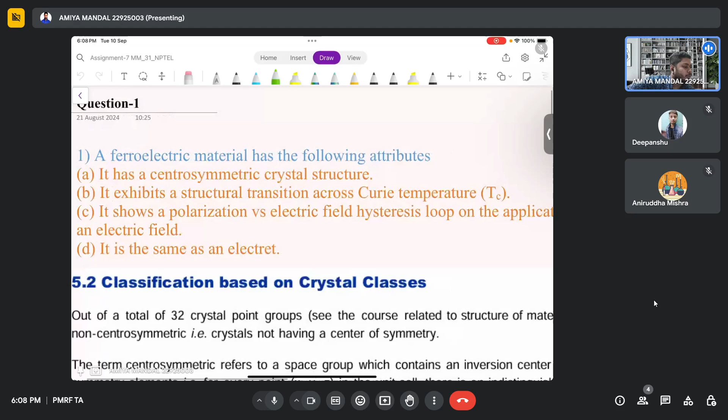So let's see what question number 1 is about. A ferroelectric material has the following attributes, with 4 options. It mainly discusses the basics of ferroelectric materials. It has a centrosymmetric crystal structure, it exhibits a structural transition across a certain temperature, it shows a polarization versus electric field hysteresis, or it is the same as an electret.

So first, let's understand centrosymmetric and non-centrosymmetric crystals, which I already discussed in week 6. Centrosymmetric means there must be a symmetry in the unit crystal: if a point in the crystal lattice is x, y, z with respect to the center point, then there is a symmetric point at minus x, minus y, minus z. Crystal families showing this type of symmetry are called centrosymmetric crystals.

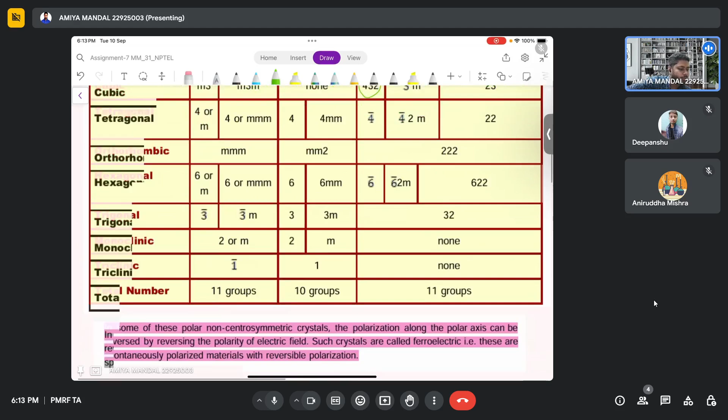This table shows the centrosymmetric and non-centrosymmetric point groups among the 32 total: 11 centrosymmetric and 21 non-centrosymmetric. There are 7 crystal systems in 3 dimensions: cubic, tetragonal, orthorhombic, hexagonal, trigonal, monoclinic, triclinic. According to them, the centrosymmetric and nonpolar point groups and the non-centrosymmetric variation are shown here.

Non-centrosymmetric means it may be polar or it may not be polar, means non-polar. So for polarization, in this case, polar non-centrosymmetric crystals are very important. Ferroelectricity comes in these classes, where the polarization along the polar axis can be reversed by reversing the polarity of electric field. This is the most important property of the polarization.

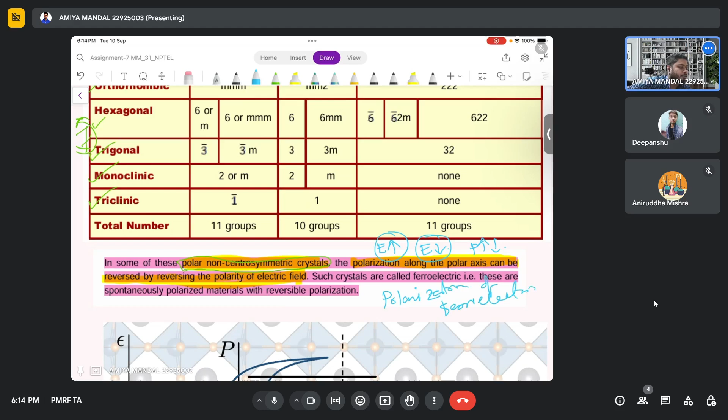The most important property of polarization is that if we reverse the polarity of the electric field, meaning if we reverse the electric field direction, then the polarization direction also reverses according to the electric field. This is the behavior of polarization in ferroelectrics. So these are spontaneously polarized materials with reversible polarization.

So these types of groups, polar non-centrosymmetric groups, show the polarization, ferroelectric behavior. This is the schematic diagram. You can see that with the application of electric field, the polarization is also increasing accordingly and decreasing accordingly after reversing the direction of electric field. That's hysteresis, and we have learned about it.

So this is the dielectric constant plot. You can see that there is a certain peak of dielectric constant, epsilon, at a certain temperature, Tc, called the Curie temperature. We will learn much more about this.

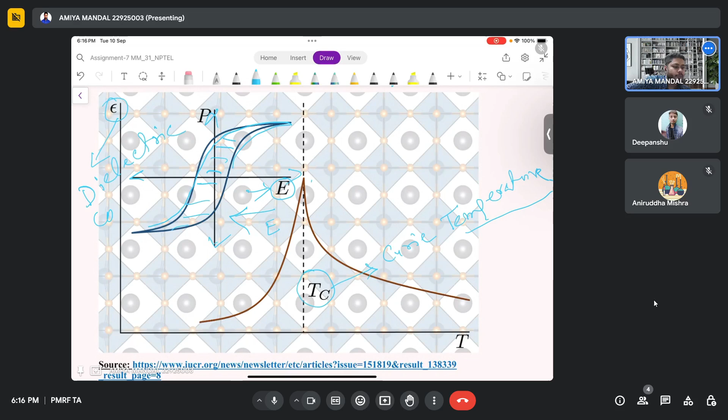I have collected it from this source. So you can see this figure showing polarization versus electric field. This is a typical PE or hysteresis loop of a ferroelectric.

Okay, just wait for a minute. Let's see. Okay, I was just checking whether it is working or not.

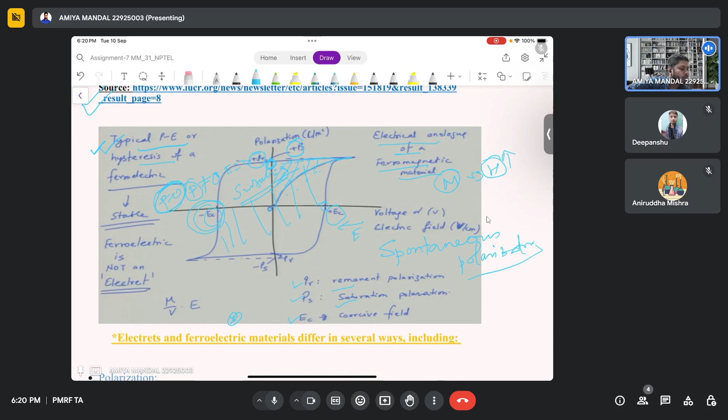There is also one thing that is the electret. The ferroelectric materials are stable, meaning after the application of electric field, they become stable at a certain point, and we get a saturation polarization. But there is a similar type of material that's called electret. So what does an electret do?

In the case of an electret, we do not get a stable value. What we get in the case of ferroelectric material, we do not get in the case of an electret material. So electret materials are different from ferroelectric materials on the basis of stability of polarization.

Okay. So polarization, ferroelectric, so stability value: ferroelectrics are stable and electrets are not stable. Okay, it's not stable. So what are the main differences between electrets and ferroelectric materials? The main difference is polarization.

Electrets have a quasi-permanent electric field on their surface, while ferroelectric material has spontaneous polarization. This is mainly the main difference. So on this basis, we can tell that it's a metastable state, and ferroelectric materials are in thermodynamic equilibrium. Okay.

So, ferroelectric state and paraelectric state, what does it imply? If you see lead zirconate or lead titanate, you can see that in a unit cell, sorry, there are different titanium atoms and oxygen atoms. At the octahedral position there is a titanium, and at the corners the unit cell consists of lead. Okay, we already have learned about this.

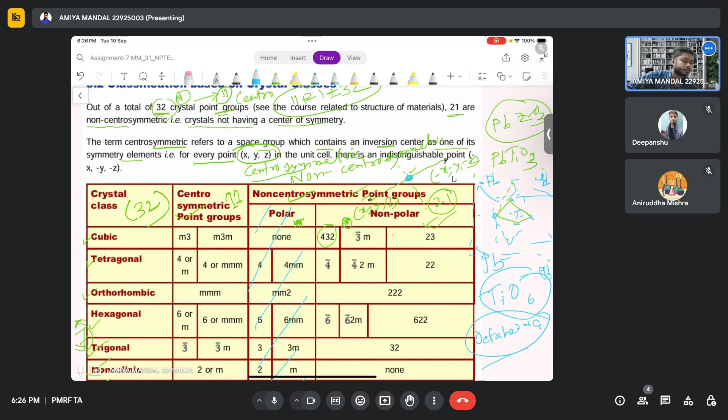So this is the titanium octahedral, TiO6 octahedral. Okay, so if its central position shifts in this direction, then it is termed as a ferroelectric material. Okay. So these paraphase and ferrophase transitions are seen in a ferroelectric material also.

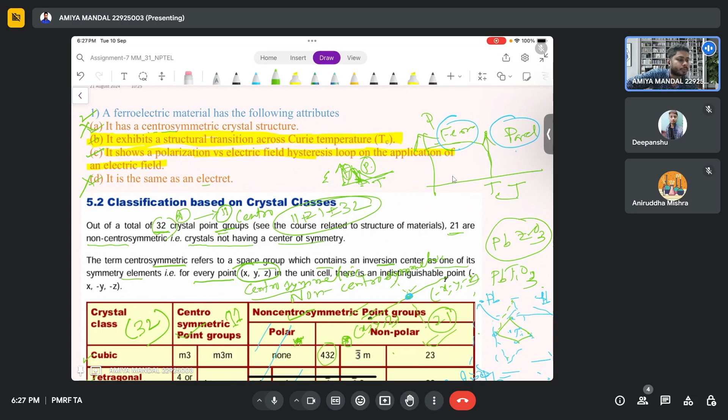At a temperature T greater than Tc, in the free energy versus polarization plot of a ferroelectric system, which are true? Free energy versus polarization plot, G versus polarization at a temperature T, you have learned about this type of figure. Okay. This type of figure, where one minimum is arising in a paraelectric state. So in paraelectric state, E is equal to 0. This indicates paraelectric state, not ferroelectric state.

For ferroelectric state, E is not equal to 0. Okay. So in paraelectric state, in order to compute non-zero polarization and susceptibility chi, at the transition point the values of the energy at P equal to 0 and P equal to P naught must be equal at Tc. Okay. So at P equal to P naught, G naught equal to 0. On the other hand, the field must also be 0. So del G del P is equal to 0 for the polarization to be spontaneous. So del G del P must be 0 there.

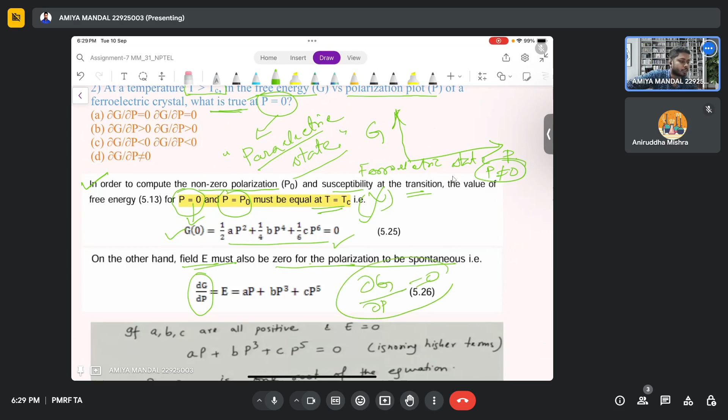Okay. Let's see what we have learned in lecture: A, B, and C are terms which are temperature dependent. A, B, C are all functions of temperature. In this G, free energy, free energy is a function of A, B, C. You already have seen that. Now, AP plus BP cubed plus CP to the power 5 equal to 0, with P equal to 0. Okay. G equal to 0, ignoring higher terms.

So what is this equation indicating? This equation indicates that if A, B, C are all positive, meaning A, B, C are greater than 0, then P equal to 0. So P equal to 0 indicates T greater than Tc, in the G versus P plot. So P equal to 0 at this point, where A, B, C are greater than 0. Okay. And this is expressed in paraelectrics. This is called the paraelectrics.

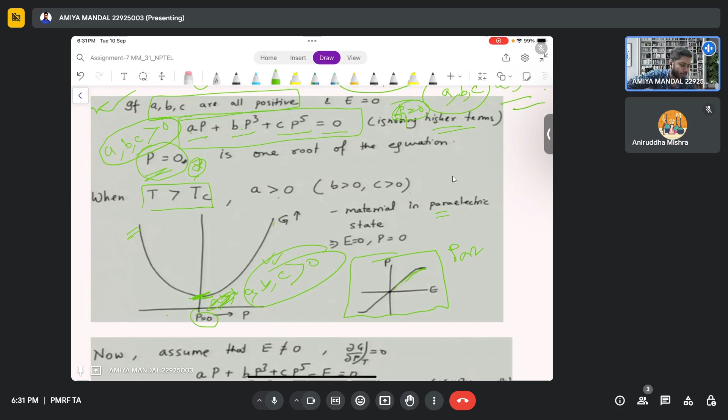Where no polarization loops are there, you can see that with the increment of electric field, it is following the same line; that is paraelectric. Okay, this is the paraelectric state. Now assume that if E is not equal to 0, then del G del P equals E. Here E is involved. And if we ignore these two terms, then we get A equal to E by P. So A inverse equal to P by E. P by E is nothing but chi.

So this is nothing but chi, susceptibility. Okay. So, sorry, this is the case for a greater than 0, which always tells about the paraelectric state, or T greater than Tc. Okay. If we consider a less than 0, means at T less than Tc, when the temperature is less than this transition temperature, then what does it follow?

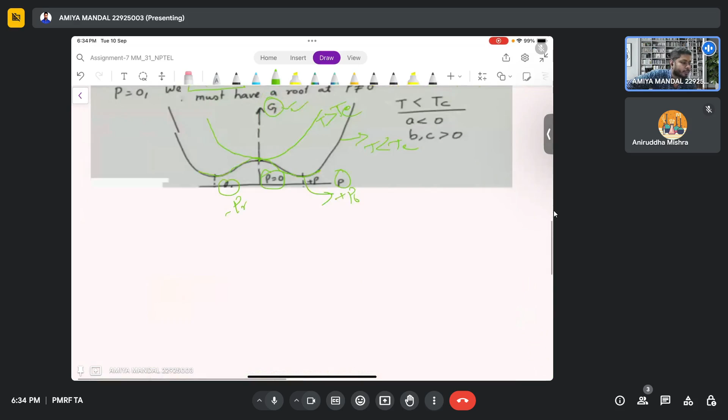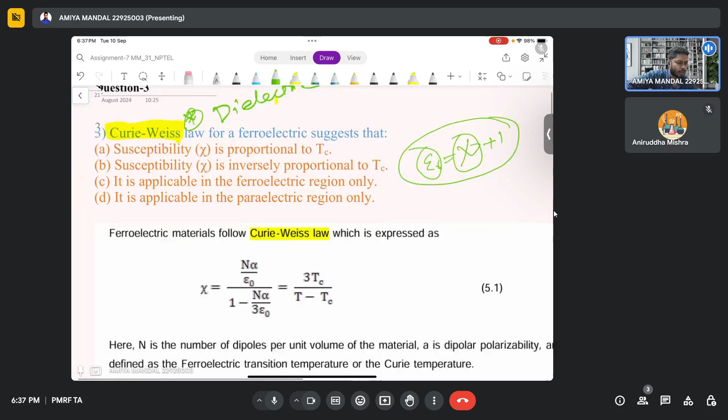So how susceptibility varies with temperature. You have seen this famous relation of Curie-Weiss law, where susceptibility varies with T by Tc minus 1. So this susceptibility varies inversely proportional to Tc.

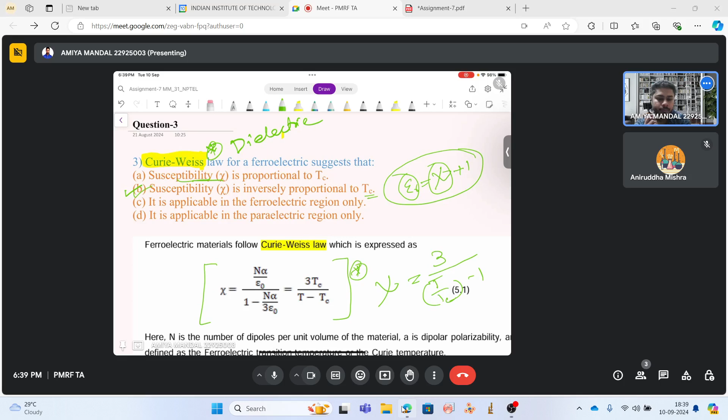Okay, I was just checking the mic. Okay. Has gone there. Okay, now we can start.

We are just telling about the Curie-Weiss law. It is inversely proportional to the Tc, where you can see the ferroelectric material showing Curie-Weiss law. N is the number of dipoles per unit volume of a material. Alpha is dipolar polarizability, and Tc is defined as the ferroelectric transition temperature.

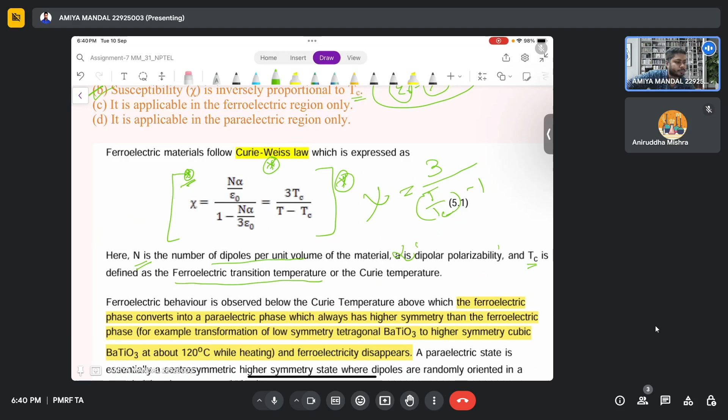If you see the variation of chi, there is a certain jump at a particular temperature. This is the ferroelectric transition temperature. It varies inversely with temperature at T greater than Tc. Ferroelectric behavior is observed below the Curie temperature Tc, and the ferroelectric phase converts into a paraelectric phase at T greater than Tc. Paraelectric phases have higher symmetry than a ferroelectric phase.

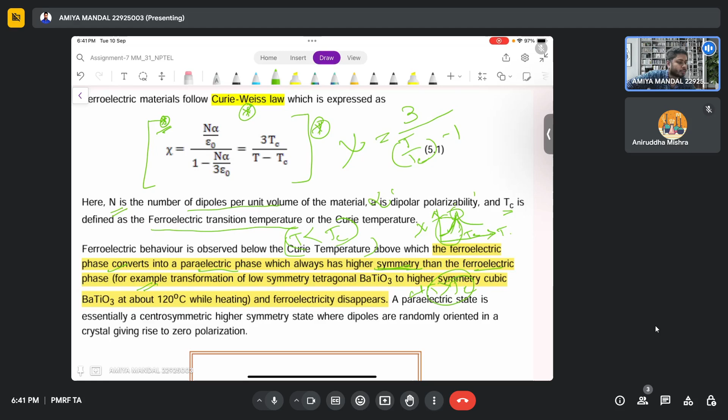For example, the transformation of low symmetry tetragonal barium titanate. Barium titanate has tetragonal symmetry at T less than Tc. Its Tc is approximately 120 degrees centigrade. For T greater than 120, it shows cubic structure, so cubic is more stable. This transition is seen in barium titanate. Barium titanate is a pure perovskite material, which has ABO3 structure.

Similar type of material like lead titanate also shows phase transition around the Curie temperature, where higher symmetric cubic to tetragonal-like structures are observed. These transitions occur due to symmetry changes around the Curie temperature.

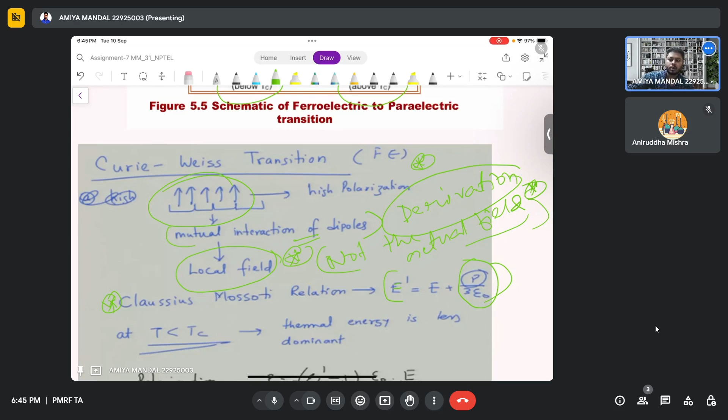On the basis of the Clausius-Mossotti relation, we can see that this local field is greater than the actual field, as it depends on the polarization.

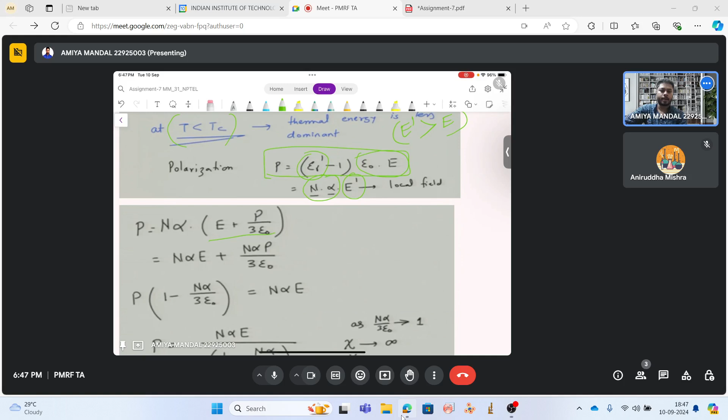If we take it to the left side and try to find the value of P only, then as n alpha by 3 epsilon tends to 1, chi tends to infinity, then 1 by chi tends to 0, then 0. This chi value and epsilon value are related to these constants, and this behavior - dielectric constant and 1 by chi - varies continuously at T equal to Tc.

At T equal to Tc, the dipolar polarization - all this you have learned in lecture classes - I'm just recapping so you can answer the question. Alpha D is much, much greater than alpha E plus alpha I plus alpha, that is electronic polarization, ionic polarization and interfacial polarization - we do not consider these at Tc. Only alpha D, only dipolar polarization exists.

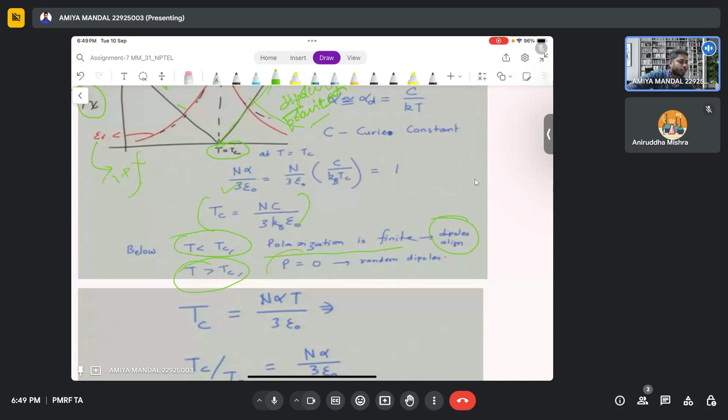At T less than Tc, polarization is finite, that is dipolar alignment. At T greater than Tc, P is equal to 0, that is random dipoles. These are the two very important points: at T less than Tc there is polarization, P not equal to 0, and T greater than Tc gives no polarization. This gives you the paraelectric state, and this gives you the ferroelectric state.

On the basis of this, you can now answer that the Curie-Weiss law for a ferroelectric suggests that the susceptibility is inversely proportional to Tc. This will be the correct answer, and it is applicable in the paraelectric region only, as we applied the Curie-Weiss law at T greater than Tc.

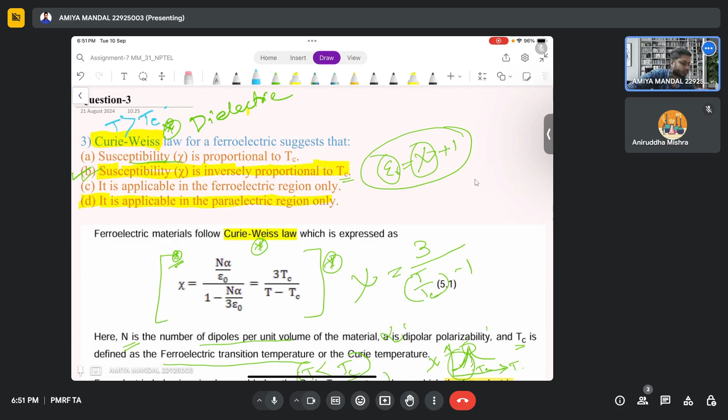Now we are moving to question number 4.

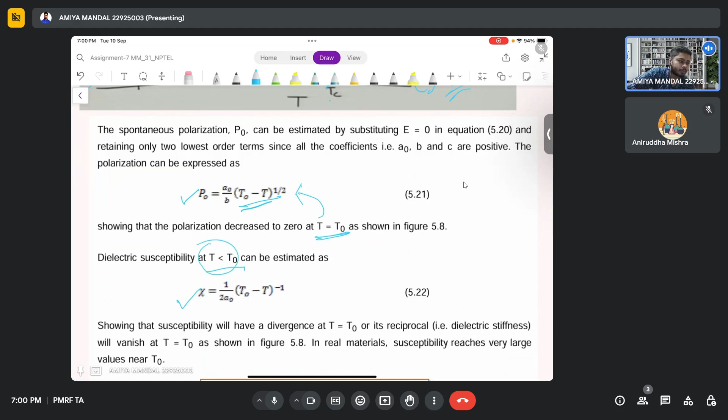So these are some properties of the dielectric, the chi value and polarization value. Here you can see how polarization value with temperature T changes: at T equal to T naught it changes this way, at T less than T naught it is decreasing, with respect to T naught. So on this basis, how chi varies and how polarization varies in second order phase transition has been shown here.

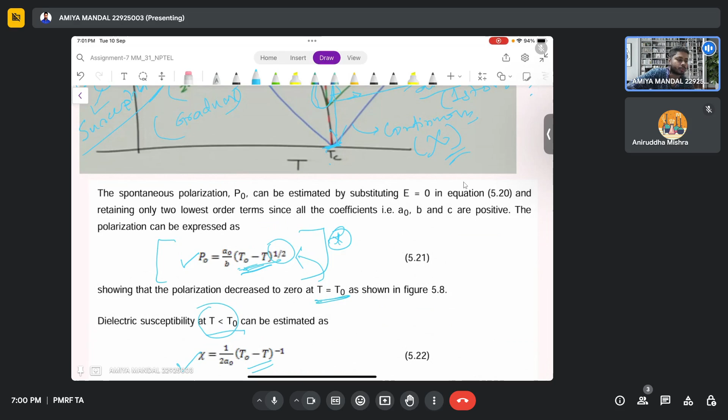This follows the equation you can see: at T equal to T naught, it varies as to the power half. At T equal to T naught, it goes to 0. It depends on A naught and B values. Similarly, it depends on 1 by A naught value and is inversely proportional. On the basis of these two relations, we can tell how P and chi vary, how these two terms vary. But I have told you how first order and second order cases vary, how the dependency joins.

So now you can see what the answer will be. First, it shows the sudden change - no, there should not be a sudden change, there is a gradual change. So it shows the gradual change in the polarization. And next, susceptibility also shows a gradual change at Tc. Both properties, susceptibility and polarization, both show a gradual change. Only gradual changes will be there, no abrupt change.

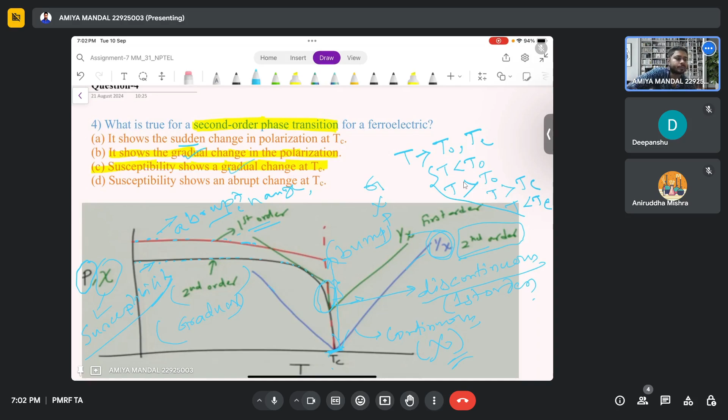What happens to a ferroelectric material when its temperature changes from T1 to Tc? TC means the question is: when a ferroelectric material goes up to TC value from T1 to TC, how does polarization value, E value change, and how does epsilon R value change? Both these changes - this is the question.

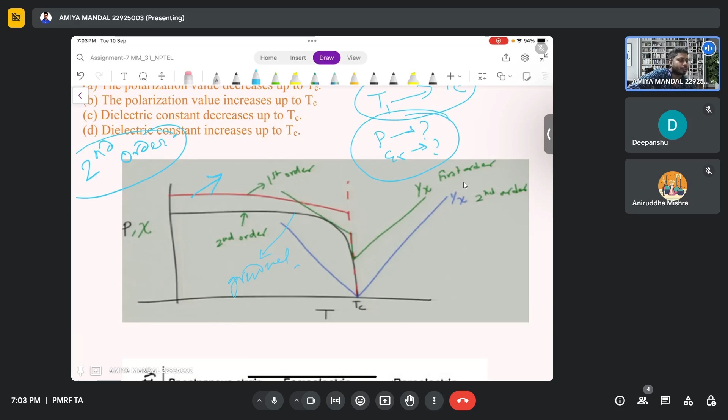So you have seen that for this is the case of second order transition. You can see that for second order there is a gradual change for P, and this is the abrupt change, and this is a continuous change. There is a bump for chi.

So dielectric permittivity, that is the epsilon R value, how it changes up to Tc. This is the region where T is less than Tc. So I am going from T1 temperature to Tc temperature, and in this region the dielectric constant is increasing up to Tc. So in this region, it's showing ferroelectric tetragonal phase, and in this region it's showing paraelectric cubic phase. That is cubic phase, which is the more stable phase.

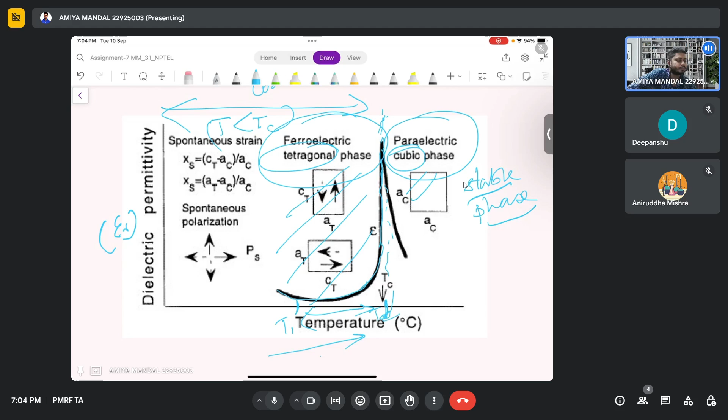So up to Tc, dielectric constant is increasing, and polarization is decreasing. This is the question: what happens to the ferroelectric material when its temperature changes from T1 to Tc? From temperature T1 to Tc, the polarization is decreasing, and from temperature T1 to Tc, the dielectric constant is increasing. So what will be the answer?

Polarization value - it will be a decreased value. So polarization value decreases up to Tc. This will be the answer. And what will be the second answer? The dielectric constant value increases up to Tc. So options B and C should not be correct.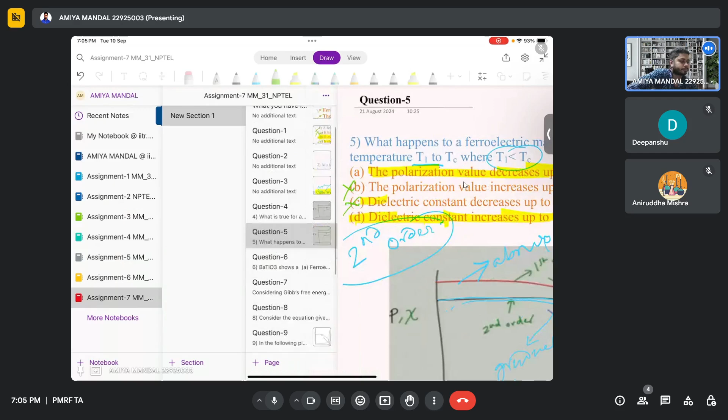Question number 6: barium titanate. This is also a ferroelectric material, a perovskite material with ABO3 structure, where titanium forms the octahedra. It shows two types of variation, tetragonal and cubic, for T less than Tc and T greater than Tc. Tc here is 120 degree centigrade. These are some basic information about barium titanate. So barium titanate is a ferroelectric material.

So it shows a dielectric constant versus temperature plot - how does it behave? It shoots up at Tc. And polarization versus T value decreases at a certain temperature, Tc. It shows that polarization follows a second order transition, because polarization value is decreasing up to a certain temperature with no discontinuity. For polarization versus temperature, there is no discontinuity.

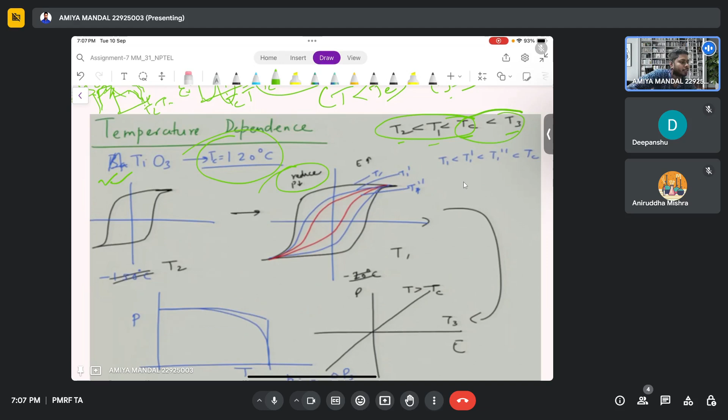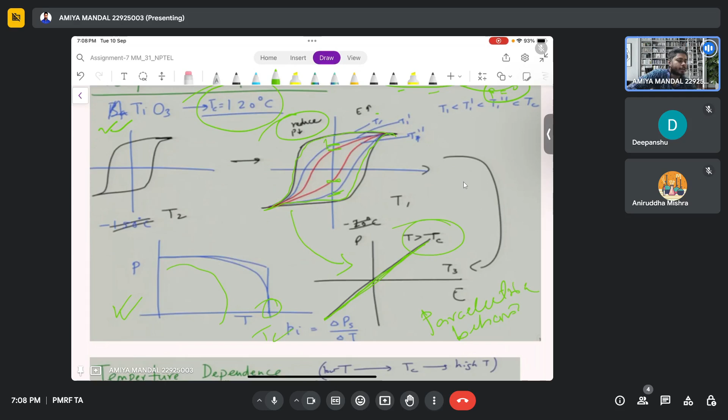So just see this figure for barium titanate, whose transition temperature is 120 degrees centigrade. When we increase temperature from T2 to T1 to Tc to T3, these are less than Curie temperature, so for T less than Curie temperature, it's going to reduce P, and when it is greater than Tc, P equals 0. So P value always goes on reducing. You can see for T1, for T2, much polarization is given, and the PR value is going to be reduced with increasing temperature. So polarization value is going to be reduced at a particular temperature Tc, and for T greater than Tc, this type of behavior is a paraelectric behavior, shown in this figure.

So what will be the temperature dependent plot? What will be the temperature dependent characteristics of ferroelectric material? There should be a phase transition from a non-centrosymmetric to centrosymmetric phase. Non-centrosymmetric, that is tetragonal. Centrosymmetric phase, like cubic phase. This much amount of transition has also occurred here.

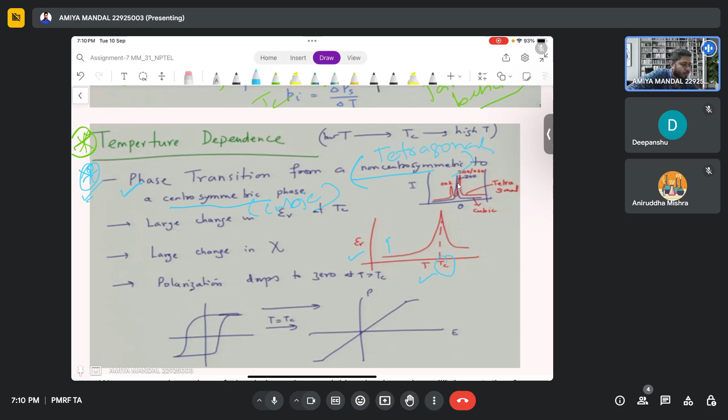So if anyone faces any problem, you can inform me. So phase transition from tetragonal to cubic phase occurs in this direction. So this is the dielectric constant versus temperature plot. You can see at transition temperature Tc, from ferroelectric state to paraelectric state transition occurs, and ferroelectric polarization drops to 0. Polarization is 0 at Tc here - in these cases it drops to 0, and at Tc it becomes paraelectric state. So this is paraelectricity - ferroelectric to paraelectric transition.

Okay, so we can get the values of free energy - how the free energy value changes. Free energy values are dependent on, this is a function of polarization, and sigma also - this is a function of temperature also. We just consider P and T, not sigma. So A, B, C - these are temperature dependent.

These are temperature dependent. These powers are taken for plus/minus PS, saturation polarization, two plus/minus states. So only even powers have been considered because of the two states: one is plus, one is minus. So even powers you can see: 2, 4, 6. So A, B, C are all temperature dependent.

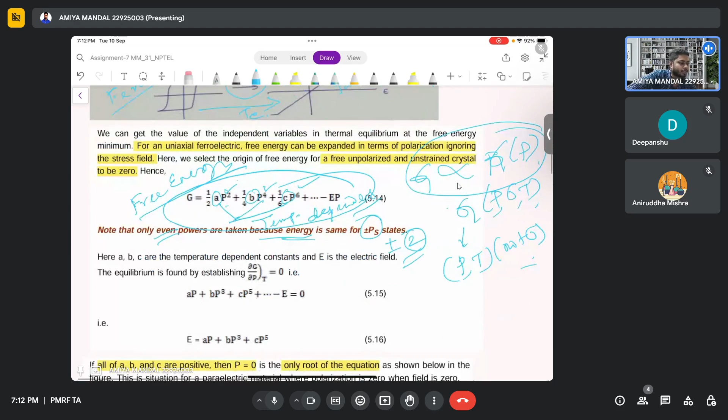So how G is changing with temperature. So E value is ultimately giving this value. When A, B, C are positive, then P equals 0. It gives the paraelectric state, for T greater than Tc, when A greater than 0. But for A less than 0, we take T less than Tc.

You already have learned that susceptibility is nothing but A inverse. On the basis of this, after putting this temperature dependent A value and ignoring these terms, we also get G as a function of T, for T greater than T naught, and T much less than T naught, where A is less than 0. Means this portion and this portion.

So free energy has one minimum for a paraelectric case, only one minimum because polarization is 0. And here two minima are there. Why? Because of the plus/minus PS state. So two minima are there for a P loop.

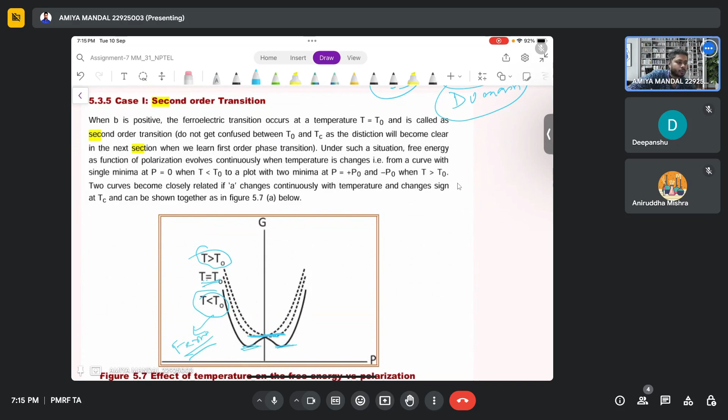And in the case of second order phase transition, for T greater than T naught, there is a minimum. For T equal to T naught, there is also a flat minimum, you can see. And for T less than T naught, it shows the ferroelectric state, so two minima should be there. According to this relation, P naught varies with temperature, and it decreases,

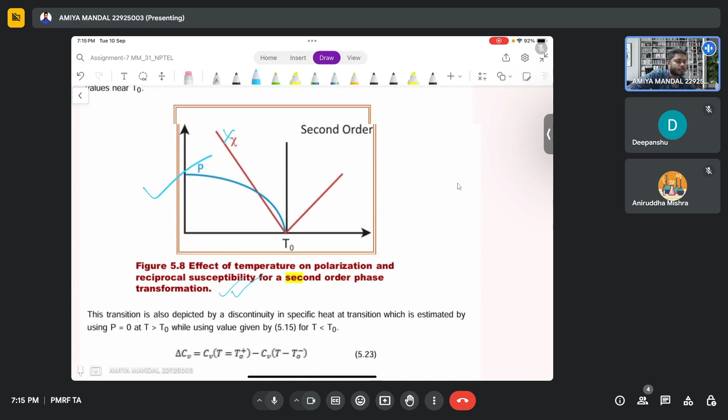and chi inverse, 1 by chi, shows this. And the variation for a second order transition looks like this type of behavior: polarization versus reciprocal of susceptibility. This is the reciprocal.

This is the CV value, the specific heat value. How specific heat depends on CV, at constant volume. And how it depends on temperature is also given: it depends on A naught and 2B.

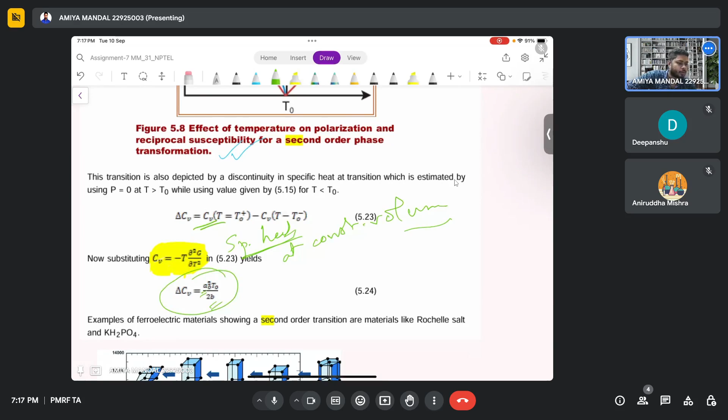And this is a diagram of barium titanate at different temperatures. Just see the regions of temperature. This is one region of temperature, this is another region. So in this region, means minus 160 degrees to minus 100 degrees,

you can see it shows a rhombohedral phase. There is a rhombohedral to orthorhombic phase transition at this temperature, minus 100 degrees centigrade, and there should be a bump there. And up to 5 degrees centigrade,

this shows the orthorhombic phase, where A not equal to B not equal to C. And at this temperature, tetragonal phases are there. In the tetragonal phase, A is equal to B, but there is a difference of angle, and the most stable figure is obtained at 120 degrees centigrade.

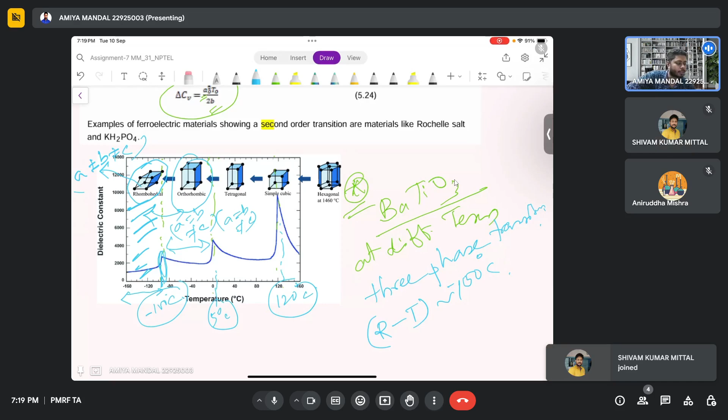Near about minus 100 degrees centigrade, and orthorhombic to tetragonal at near about 5 degrees centigrade. And tetragonal to simple cubic occurs at near about 120 degrees centigrade. So these three phase transitions occur at different temperatures, and their corresponding structural figures are also shown.

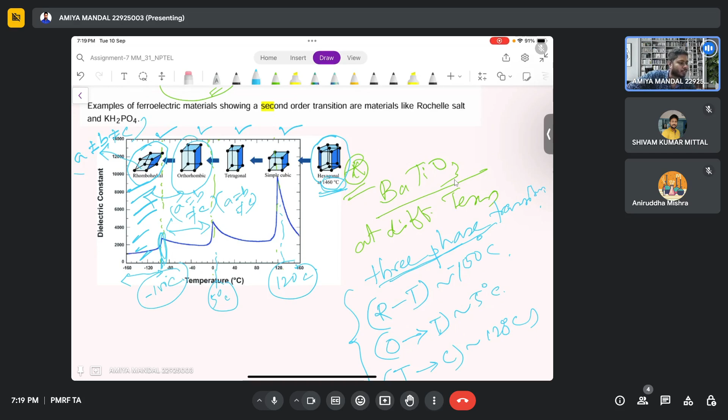And near about 1460 degree temperature, hexagonal figures can also be obtained, but these temperatures are not reached in real cases, so we do not observe it in a real case. Some scientists have also observed that. So we are mainly interested in these three regions. Everything tells us how phases change at different temperature regions for a barium titanate material.

So how is the dielectric constant varying? It's a temperature dependent property, and how it behaves in this phase, in this region. You can see that in this region, the tetragonal phase, it is a ferroelectric material. Ferroelectricity is observed there. That is, P not equal to 0.

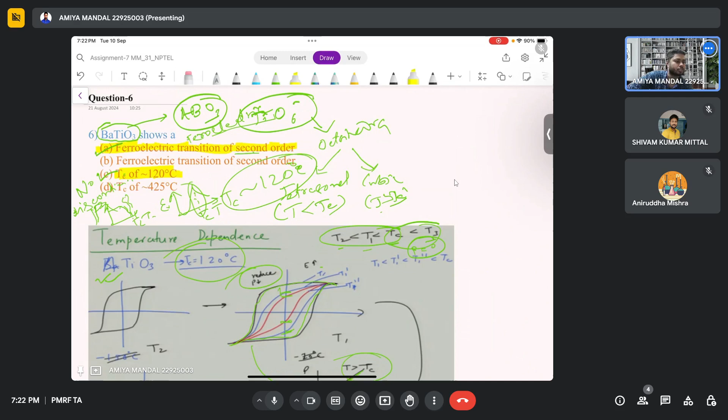Go to question number 7. Considering Gibbs free energy of a uniaxial ferroelectric material. Uniaxial ferroelectric material means ignore the sigma stress value. So Gibbs free energy is only dependent on polarization and temperature. That's why it is given in this fashion. This is nothing but the Gibbs free energy expression. So here, when the free energy is minimum, we can get these types of behavior.

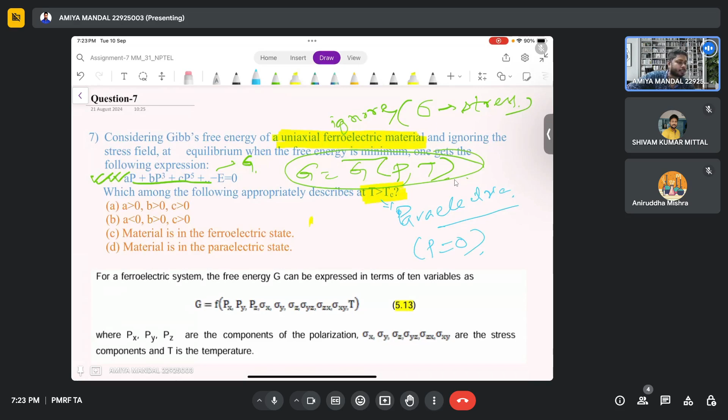So what is the behavior at T greater than Tc? We already have learned that at T greater than Tc, it shows paraelectric behavior, where P is equal to 0. We already have learned that G is dependent on P, on sigma, and on T. So for uniaxial cases, we do not consider sigma; we consider only P and T.

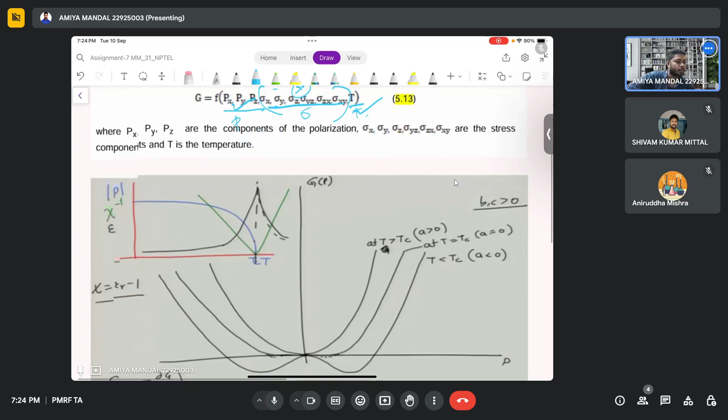So for these cases, we have seen that this is a case of second order phase transition. G value and P value are varying. There is a minimum value at T equal to Tc, where A is equal to 0. And for A greater than 0, there is also a minimum. Only one minima is there for the G versus P plot. But at T less than Tc, it shows ferroelectric behavior. Plus minus Ps consideration is also there, for the case of these two minima.

These two minima occur at plus Pr and minus Pr, at these 2 points. So two minima occur at T less than Tc where A is less than 0. And in this case, A greater than 0. So the value of A is varying. When A, B, C, all three are positive, it follows this region. And this is nothing but entropy; it is temperature dependent. We are not interested in this. Second order phase transition is seen in Rochelle salt, KH2PO4.

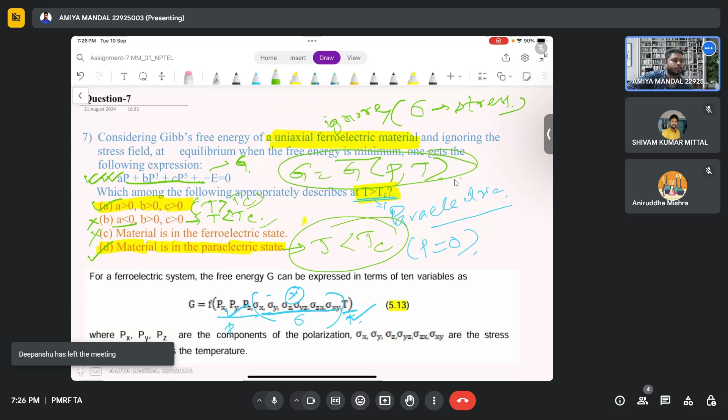Consider the equation in question number 7: a P + b P³ + c P⁵ minus E equal to 0. This was given in question number 7. What will be the value of a?

It has already been told that when the value of a is greater than 0, it is lying at T greater than Tc. And when the value of a is less than 0, it is lying at T less than Tc. It denotes the ferroelectric phase. It denotes the paraelectric phase. Okay, the similar figure. This denotes the paraelectric phase, plus here, minus here.

So there is an energy graph. Okay, there is an energy graph. And this is nothing but the polarization value, how the polarization value is decreasing with temperature. Polarization value is decreasing up to the transition temperature. Okay, so all these are second order phase transitions, and this question is also based on the second order phase transition.

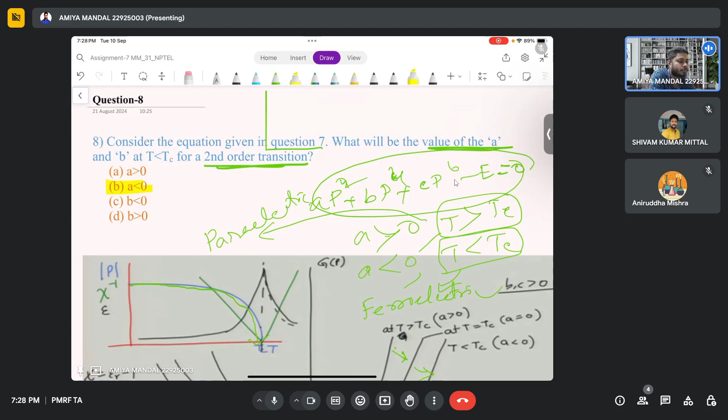What will be the value of A and B? So the value of A in this case will be less than 0 for T less than Tc. For T less than Tc, A will be negative, but the B value should be greater than 0, and the others are incorrect. Okay, so only two options are correct.

Question number 9. Just see this figure. Just see this figure and try to find out the answer. In the following plot, I'm just checking everything is fine or not.

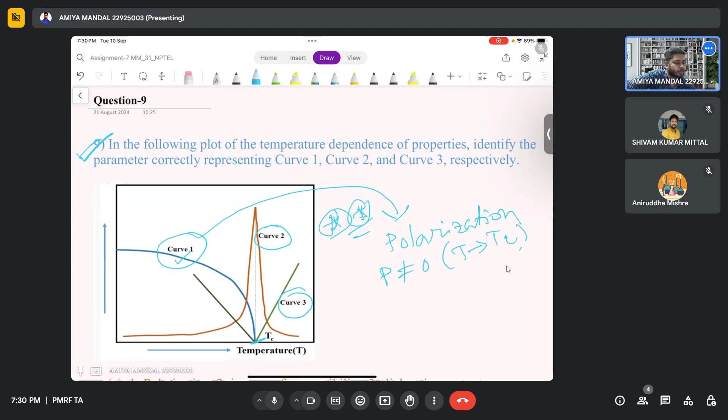Okay, three curves are given. This green blue curve, what does this signify, curve 2, and curve 3? So curve 1 is nothing but the polarization curve. This is a Curie temperature polarization curve, where polarization decreases; the P value is not equal to 0 up to T equal to Tc. P value is 0 at T greater than or equal to Tc.

So this is a polarization curve, and curve 2 is the dielectric constant curve, epsilon r. For the dielectric constant, there is a certain peak at Tc. The maximum value of the dielectric curve has been observed at Tc.

And this green curve is nothing but the 1 by chi value, the inverse of susceptibility. So the answer should be option 2. 1 is telling about the polarization, second is telling about the dielectric constant, third is telling about the inverse susceptibility, which is 1 by chi, in a second order phase transition only. This plot is correct only for second order phase transition.

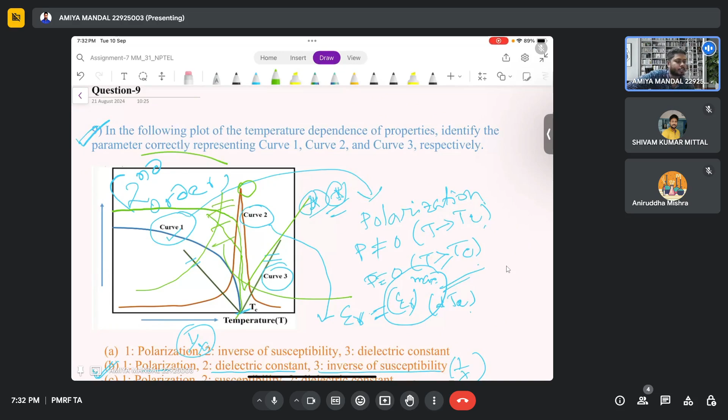For first order phase transition, there should be a jump at this point. There should be a discontinuity in chi also, and the dielectric constant variation should be like this. There should be a discontinuity in first order, but this is the case of second order. You already have learned about how ferroelectric and paraelectric phases are converted.

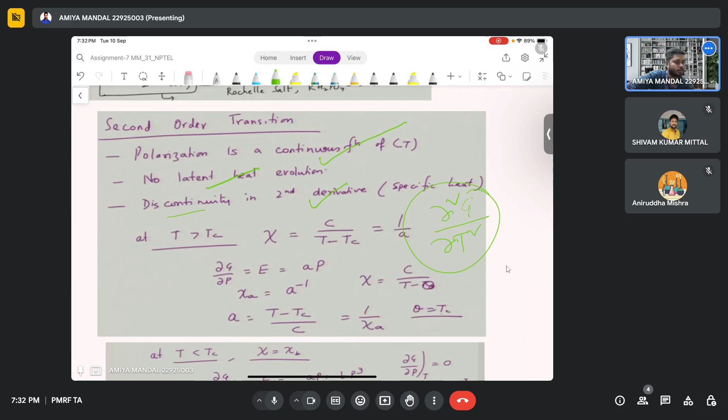For second order phase transition, polarization is continuous, no latent heat is generated, and there is a discontinuity in the second derivative. So ∂²G/∂T², this is discontinuous. And how chi, 1 by chi, is varied with temperature, you already have learned. These are all explained in your lecture class.

How it depends on A and B. You can see how 1 by chi is dependent for T greater than Tc and for T less than Tc, how chi A and chi B are temperature dependent for T greater than Tc and T less than Tc. On the basis of these two, 1 by chi varies at temperature Tc like this. This is the variation.

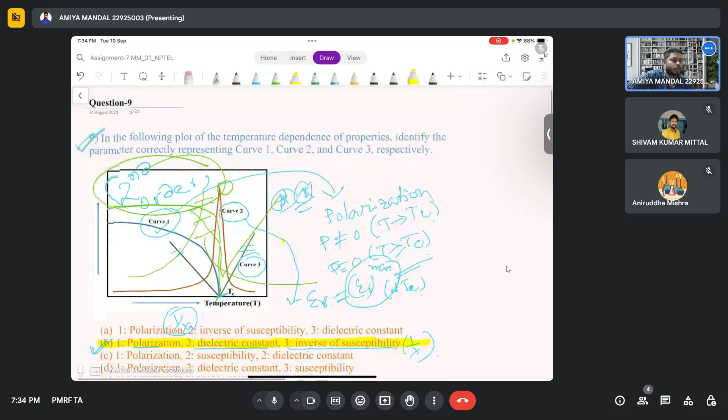On the basis of these two, it has two slopes, and this has one slope value. So on the basis of this, option 2 should be the answer of this question. Okay, now we are moving forward to question number 10. Okay, at Tc.

Okay, now the question is based on this first order phase transition. So you must know how the first order phase transition occurs. In case of second order phase transition, the question is telling about T equal to Tc. In case of second order phase transition, we've seen the temperature ranges T less than Tc, T equal to Tc, and T greater than Tc.

For first order, we consider a temperature T naught. From three regions we consider T less than T naught, T greater than T naught, T naught is less than Tc, or here you can also consider T naught equal to Tc, or T greater than Tc. Sorry, T greater than Tc should be there.

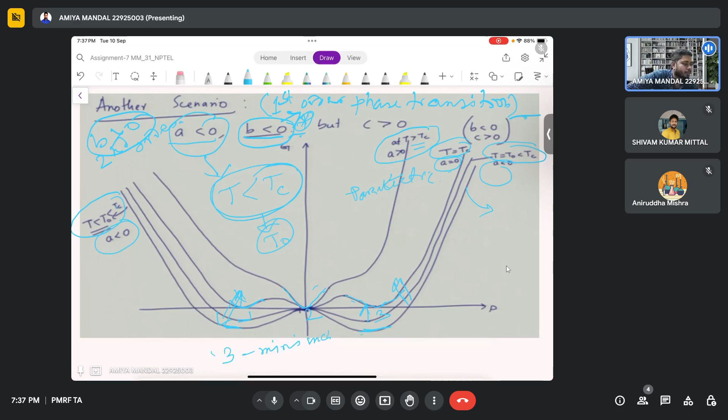Okay, but what will be the minimum in between them? Between these two figures, there are three minima: one, two, three. So three minima. This is the typical feature of the first order phase transition, that three minima would be there.

So in between, near Tc, when A less than 0 and B also less than 0, it gives you three minima positions. This is a new behavior, shifted from the second order transition.

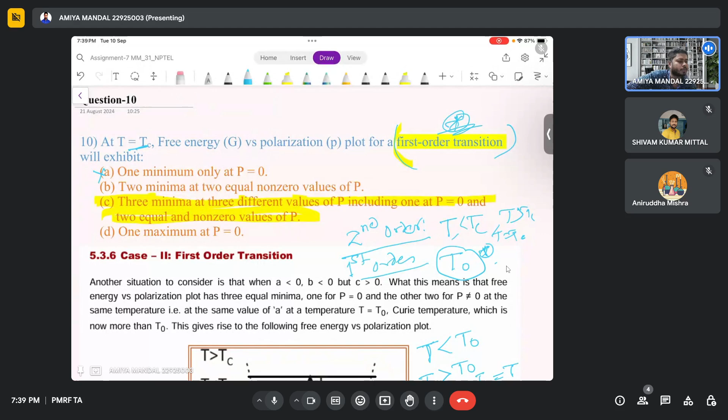So on the basis of this, we can now answer that there are three minima at different P values, including at P equal to 0. So three minima are there; it is not one minima or two minima. So only three minima is the correct answer for this.

Now question number 11. During polarization switching of a ferroelectric material. Polarization switching mainly occurs due to domain structure variation of the ferroelectric material. So how does the G ferroelectric versus polarization plot vary?

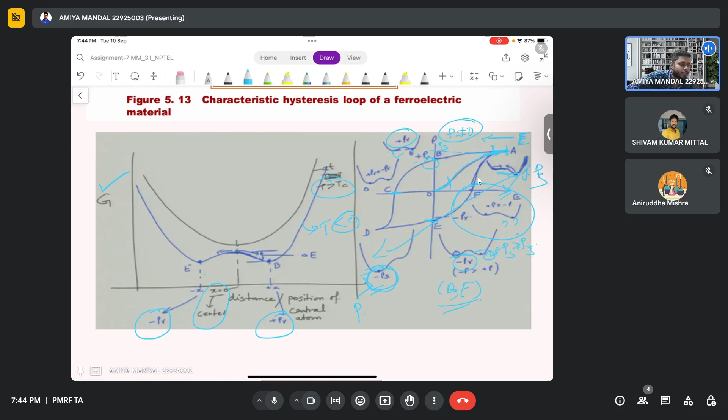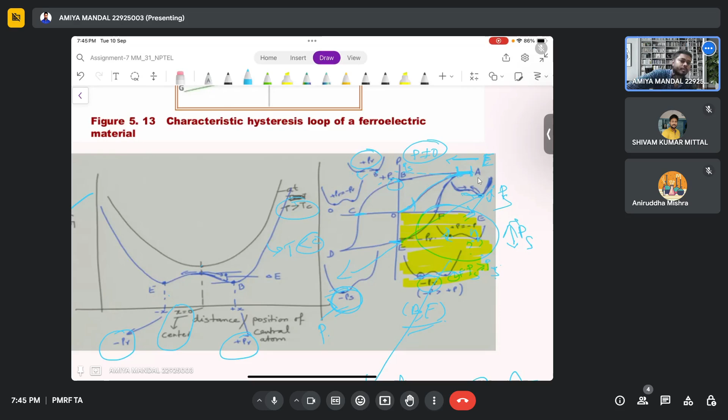So this is the theory portion, the conceptual part for question number 11. Now we are moving to question number 12. This is also a first order phase transition. So continuity and discontinuity phases of the first order phase transition: you have seen from this figure that in the first order phase transition there are 3 minima positions at T greater than T naught. And this is discontinuous. Discontinuity in P, discontinuity in 1 by chi. 1 by chi is also discontinuous.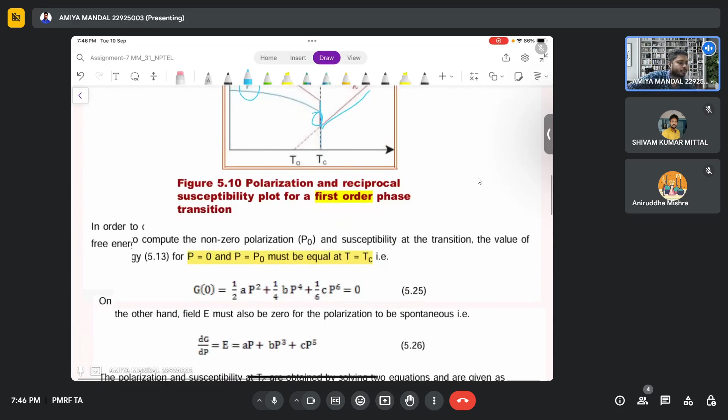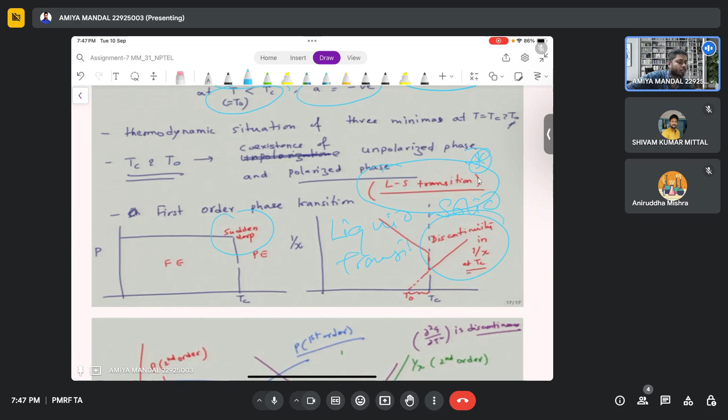Okay. And this is the sudden drop of polarization. There are T greater than Tc, where A is positive, T equal to Tc, where A is 0, and T less than T naught. So 3 regions are there, but here always b is less than 0. So the most important feature is the LS transition, liquid solid transition. So discontinuity in 1 by chi is also observed there. Okay, this I have explained.

So here the main important thing is, for the first order case del G, for the second order case del squared G, so this is discontinuous in the first order case. Latent heat is generated due to liquid solid transition. First order case is observed in barium titanate and perovskite structures. Second order is observed in Rochelle salt and lithium niobate.

So on the basis of this, you can now answer: first order phase transition susceptibility is not continuous. So this is incorrect. This is correct: discontinuity in the susceptibility across the transition temperature, and discontinuity in the first order derivative of the free energy. Okay, so these two options are correct. Option B. Option C is incorrect because this is for second order, mainly second order cases.

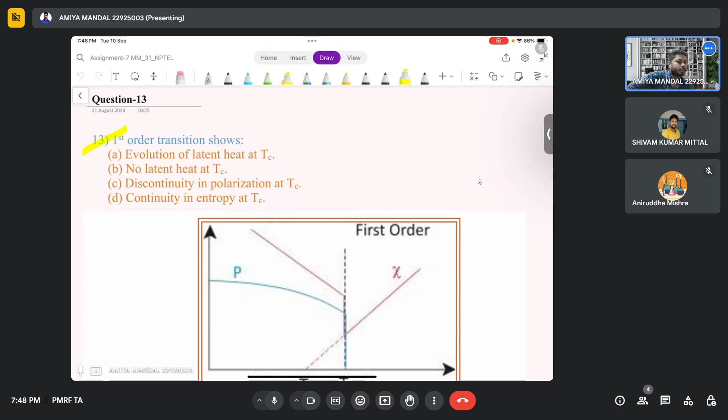Question number 13: first order transition shows... this is the same, first order transition. However, evolution of latent heat, 1 by chi discontinuity is there, and there is a liquid solid transition. Latent heat is nothing but the heat required for phase transition.

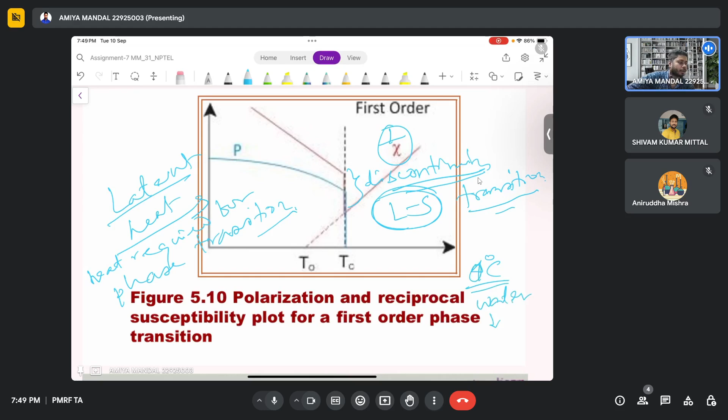Just like liquid solid transition at a particular temperature, just like 0 degrees centigrade for water and ice. Okay. So in liquid solid phase transition, latent heat is generated and del G del T is discontinuous in the case of first order transition. Okay.

Based on this information, you can also answer this question: evolution of latent heat at a particular temperature Tc, and discontinuity in polarization at Tc is also there, and these two are not correct. So only two options are correct. Continuity in entropy is nothing but del G del T at constant T. So it is also not correct, because the G value is not continuous. It varies.

Three different minimas. So in these cases, the three minimas should be there. So S is not continuous.

Okay, question number 14. For the first order transition, the question is about the slope of the plot between 1 by chi B versus A.

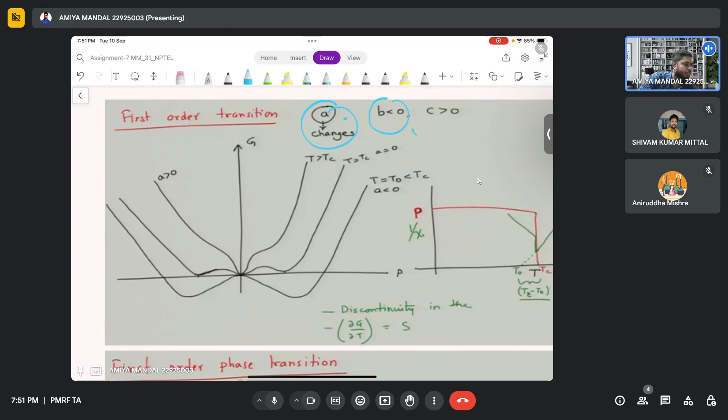So discontinuity is there. Del G del T is nothing but the entropy. It is discontinuous. Okay, first order phase transition, in case of first order phase transition, on the basis of this relation, polarization is discontinuous, entropy is discontinuous. This is first order phase transition, gives you latent heat.

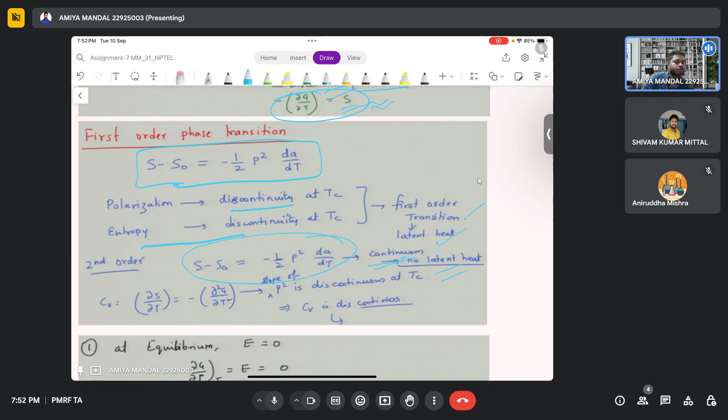And this expression gives continuous value of S, latent heat zero, but for second order transition.

After applying E equal to 0 and this condition at equilibrium, after applying this we can get the value of P. After putting this value for b less than 0, this is discontinuous value, we are getting 4. So mainly 1 by chi B is equal to 4A for T less than Tc in this region.

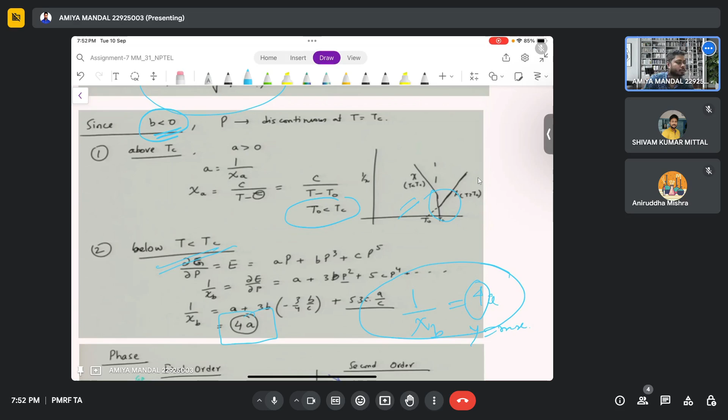So what is the slope? This is the slope, Y equal to mx. Slope is m. The slope is nothing but 4. The slope value is determined.

On the basis of this, first order phase transition and second order phase transition, how they are varying. G is continuous, discontinuous, G is continuous, this is discontinuous, this is discontinuous, this is continuous, this is discontinuous.

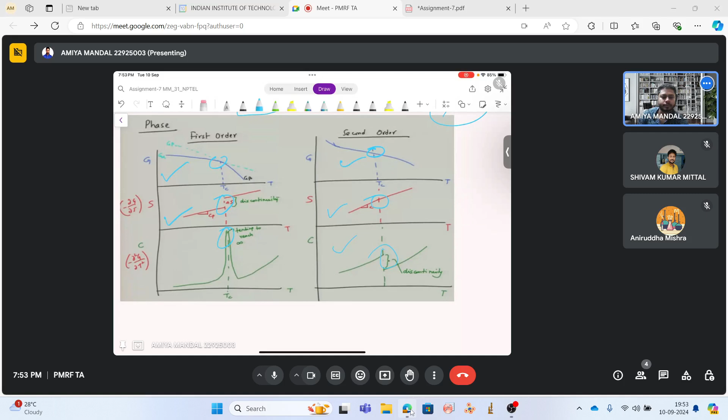So here the G value, S value, and C value have been shown, how they are continuous and how they are varying with temperature has been shown. So you can now answer that. This will be 4.

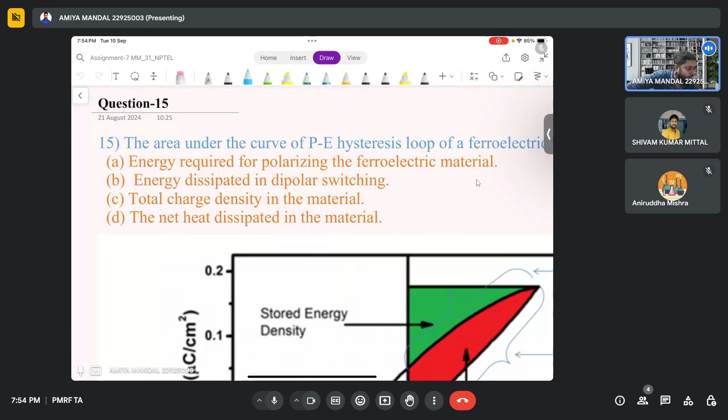So this is the correct answer. So last question, question number 15: the area under the curve of a PE loop, a hysteresis loop.

What does it signify? So when a PE loop is generated with the application of electric field, P, how P is changing. This is the typical figure where this red portion tells about the energy loss density and this green portion tells about the stored energy density. So this is the area between P and E when this is going and this is reversing back.

This is also called the W recoverable energy density, the recoverable energy density. This is the energy loss. So this is the stored energy, this is the lost energy.

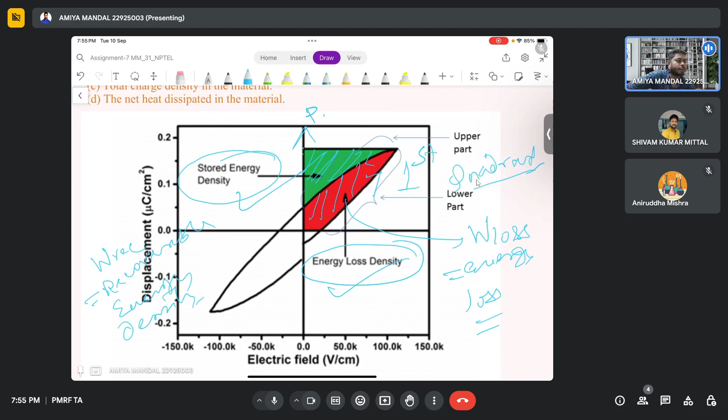This only coordinate, first quadrant. We only find it in the first quadrant. We only measure in the first quadrant.

So what will be the area under the curve of a PE loop of a ferroelectric is manifested as the energy dissipated in a dipolar switching. So here the switching, in this case, dipolar switching, PR value. Here dipolar switching occurs. So at this point, dipolar switching tells us about the energy dissipation in dipolar switching.

Others are not correct. Energy required, no, it is not that. The total charge density, no, it is also not. So only the energy dissipated is the area under the curve of the PE loop.